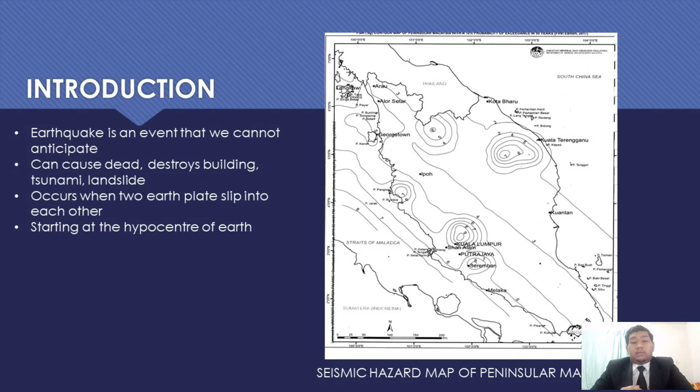This is the seismic hazard map of Peninsular Malaysia.

Problem statement. First, residential is a place or building that should protect us from any danger. But there were many buildings affected during the earthquake in Ranau, Sabah on June 2015. A residential building must sustain any disaster like earthquake because it needs to protect us from danger.

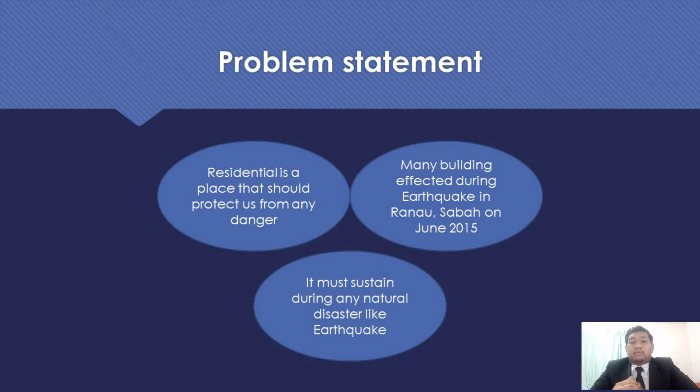There are two objectives of study for my project. First, to determine the influence of magnitude of peak ground acceleration (PGA) on the amount of steel reinforcement. Second, to determine the influence of concrete grade on the amount of steel reinforcement.

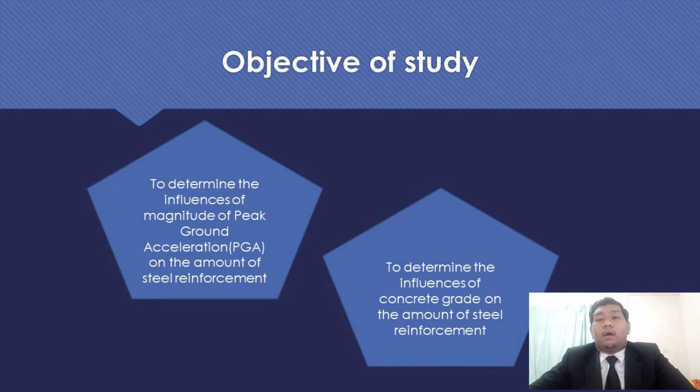Scope of study for my project: a 4-story RC building, assisted as a hostel, as the main model. 4 different magnitudes of PGA equal to 0.04G and 0.06G for ductility class low, and 0.07G and 0.09G for ductility class medium will be considered for design.

3 different grades of concrete will be used for this research: G25, G30, and G35. The model will be designed based on Eurocode 8 2004 and Malaysian National Annex 2017 for Peninsular Malaysia. Analysis and design will use Tekla Structural Designer software.

All models will be built on soil type D. The result has been discussed in terms of comparison of steel required as reinforcement, influenced by magnitude of PGA and concrete grade.

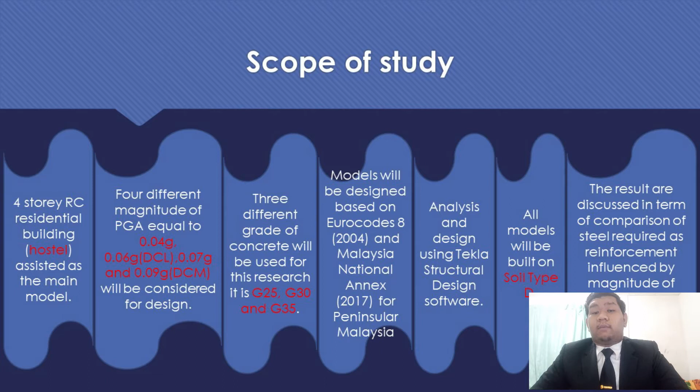My research has been supported by literature review that you can read in the slide.

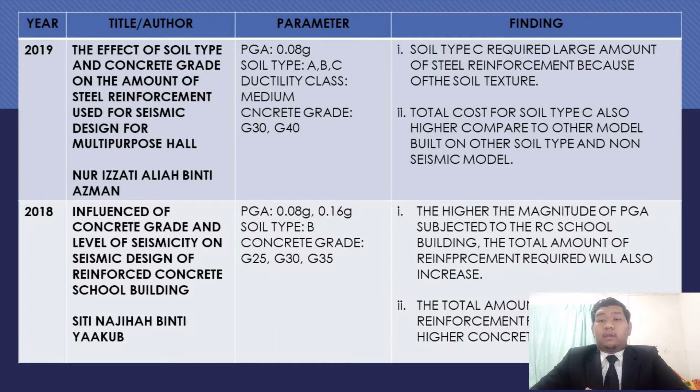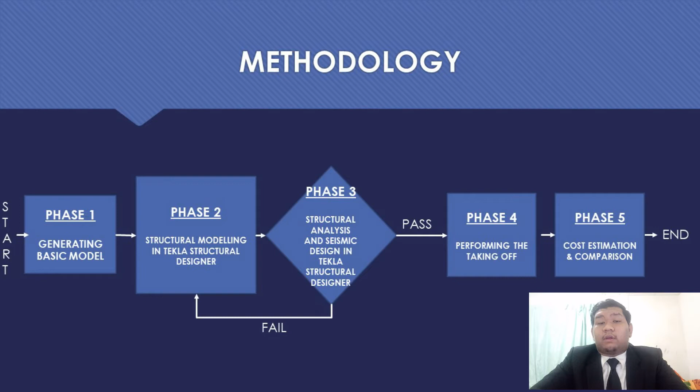This is a flowchart of methodology for my project. Phase 1, generating basic model. Phase 2, structural modeling in Tekla Structural Designer. Phase 3, structural analysis and seismic design in Tekla Structural Designer. Phase 4, performing the take-off. Phase 5, cost estimation and comparison.

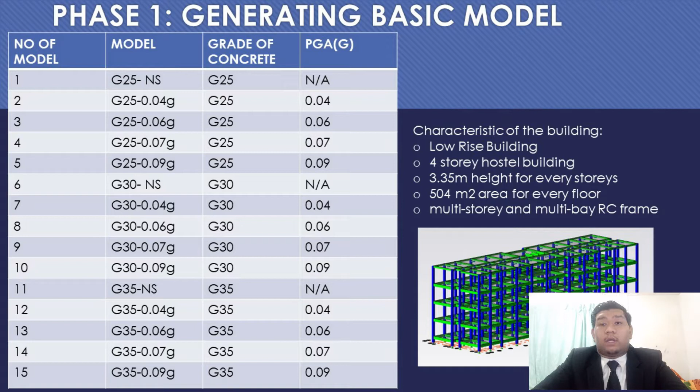Phase 1, generating basic model, which is a low-rise building: a 4-story hostel building with 3.35 meter height for every story and 504 meter square area for every floor. The building is a multi-story and multi-bay RC frame. This is the list of models that has been used for my research.

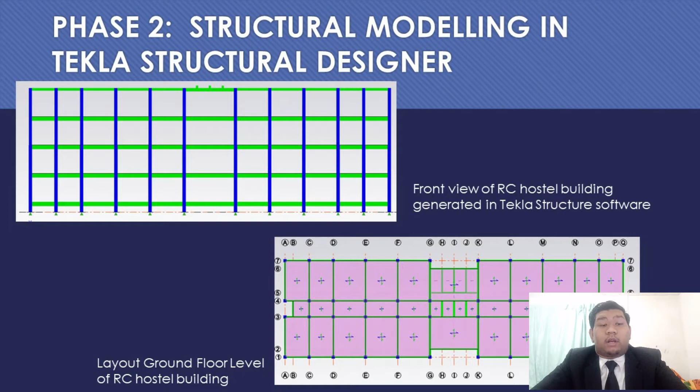Phase 2, structural modeling in Tekla Structural Designer. This is the front view of the RC hostel building and layout for ground floor level. For the building, we use two typical beams and two typical columns, which are BA, BB, CA, CB.

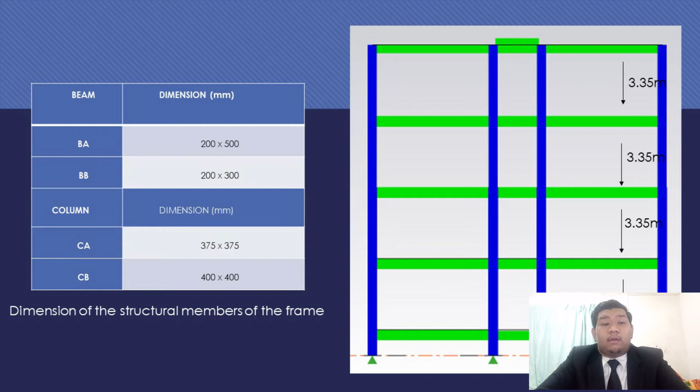Beam BA dimension is 200 mm by 500 mm. Beam BB, 200 mm by 300 mm. Column A, 375 mm by 375 mm. Column B, 400 mm by 400 mm. As you can see, this is my load case in the 4-story RC hostel building.

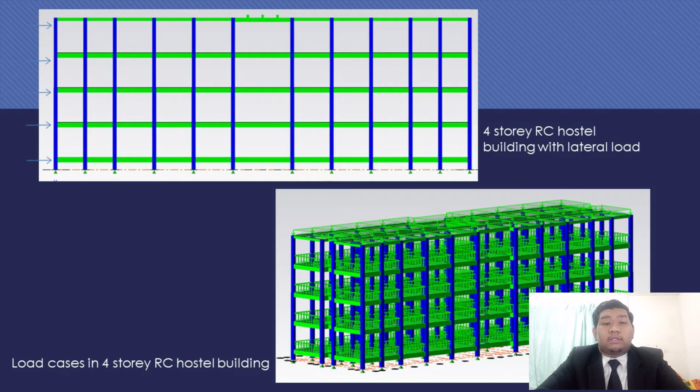Phase 3, structural analysis and seismic design using Tekla Structural Designer. This is the step to run the design. First, click the seismic wizard to set up the parameter according to the situation. Then click the design button to design and analyze the building.

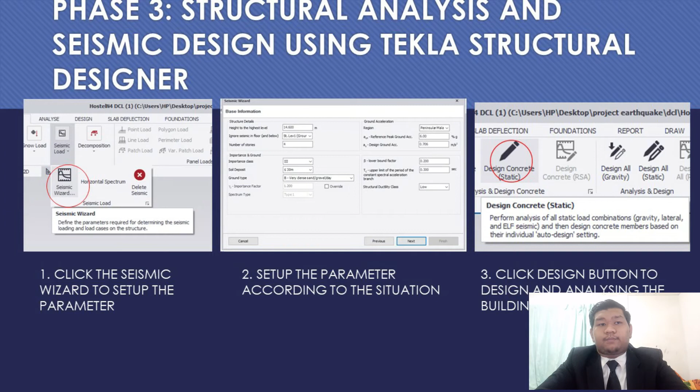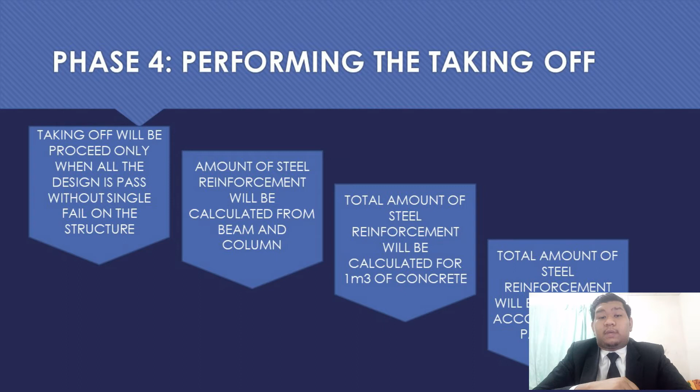Phase 4, performing the take-off. Take-off will proceed only when all the design passes without a single fail on the structure. Amount of steel reinforcement will be calculated from beam and column. Total amount of steel reinforcement will be calculated for 1 meter cube of concrete, and compared according to the parameter.

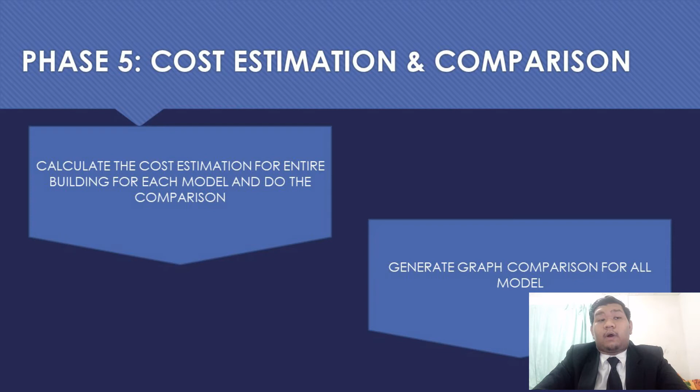Phase 5, cost estimation and comparison. Calculate the cost estimation for the entire building for each model and do the comparison. Then we proceed to the result and discussion.

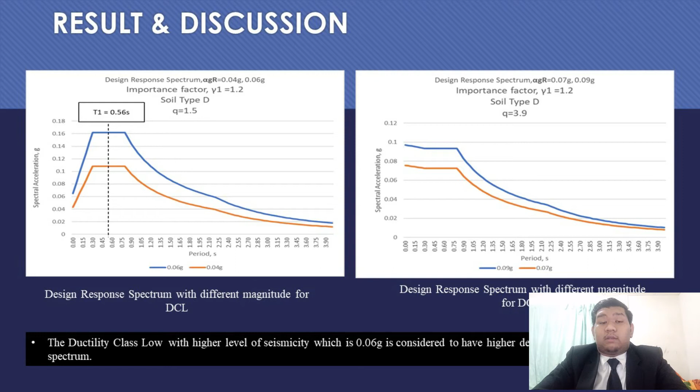This is two graphs of design response spectrum. The first one is for ductility class low, then the second one for ductility class medium. The ductility class low with high level of seismicity, 0.06g, is considered to have higher design response spectrum.

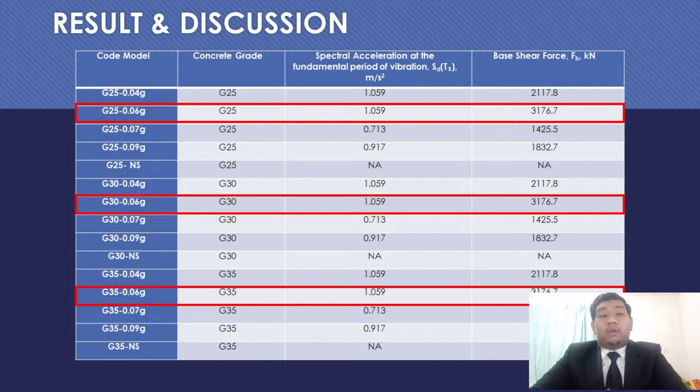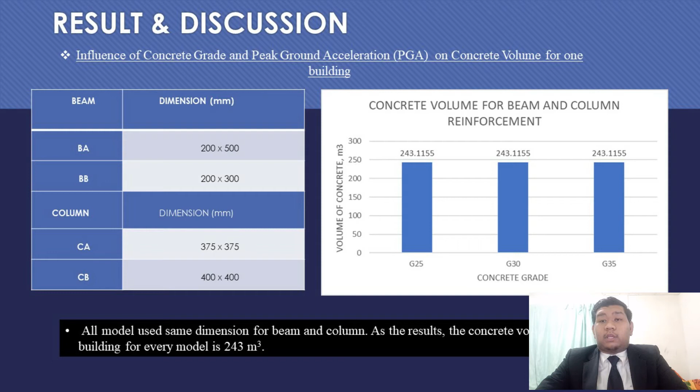This is the table for spectral acceleration of the fundamental period of vibration, Sd(T1), and base shear force. As I mentioned before, all models used the same dimension for beam and column. As a result, the concrete volume for one building for every model is equal to 243 meter cube. This is the result for the total weight of steel reinforcement per 1 meter cube concrete, normalized to the non-seismic model for concrete grade 25.

These are the percentage differences of weight of steel reinforcement per 1 meter cube concrete normalized to the non-seismic model, for concrete grade 25. PGA 0.04G is 60%, PGA 0.06G is 150%, PGA 0.07G is 20%, and PGA 0.09G is 50%. The highest percentage difference is DCL, ductility class low, with PGA 0.06G. The value is 150%.

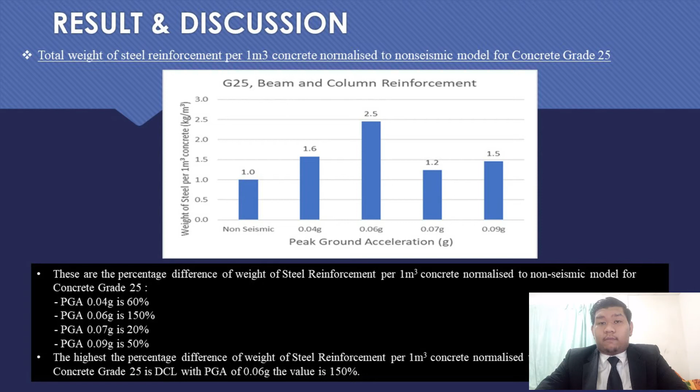This is for concrete grade 30. PGA 0.04G is 50%, PGA 0.06G is 110%, PGA 0.07G is 20%, and PGA 0.09G is 40%. The highest percentage is ductility class low with PGA of 0.06G. The value is 110%.

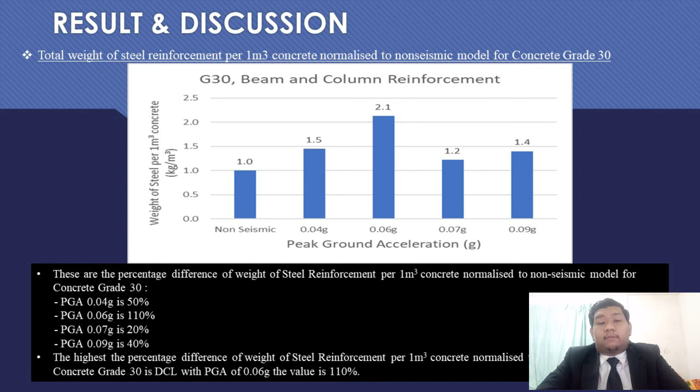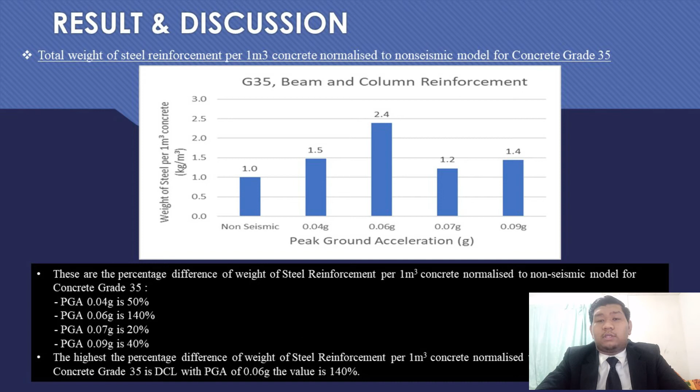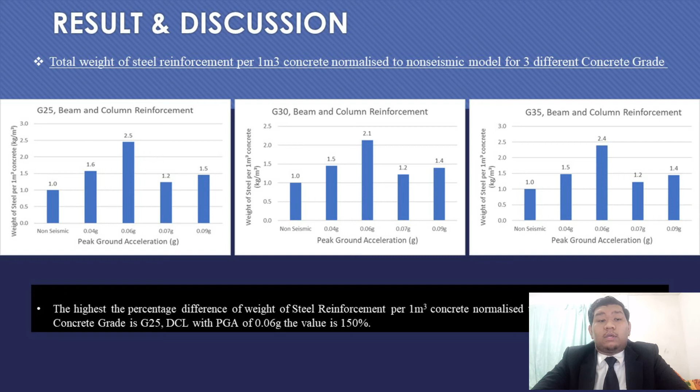Lastly, for concrete grade 35: PGA 0.04G is 50%, 0.06G is 140%, PGA 0.07G is 20%, PGA 0.09G is 40%. The higher percentage difference for concrete grade 35 is ductility class low with PGA 0.06G, the value is 140%. From the three results based on concrete grade 25, 30 and 35, the highest percentage difference overall is concrete grade 25 with PGA 0.06G, the value is 150%.

Next, we continue to total cost of material used. First, concrete grade 25 with price RM325 and 30 cent per meter cube. Concrete grade 30, RM372 and 10 cent per meter cube. Concrete grade 35, RM394 and 70 cent per meter cube. High tensile bar, RM3.50 per kg.

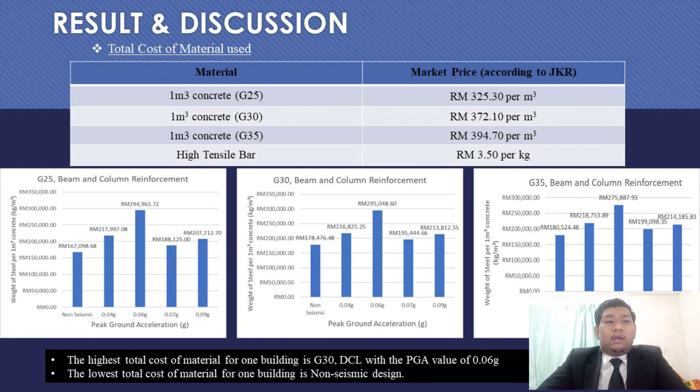The highest total cost of material for one building is for concrete grade 30 with ductility class low, PGA value of 0.06G. The lowest total cost of material for one building is the non-seismic design. This is the percentage difference of total cost of material normalized to the non-seismic model for concrete grade 25.

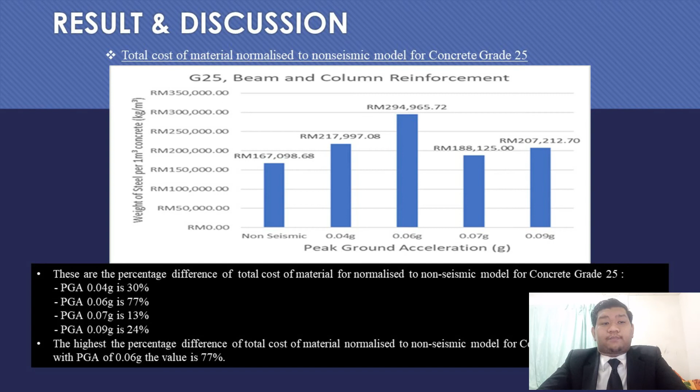This is for concrete grade 30. 0.04G is 21%, 0.06G is 65%, 0.07G is 10%, 0.09G is 20%. The highest percentage difference is PGA 0.06G, the value is 65%.

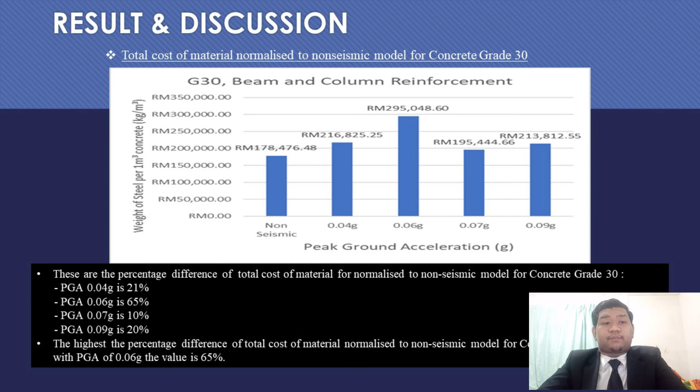Lastly, concrete grade 35: 0.04G is 21%, 0.06G is 53%, 0.07G is 10%, 0.09G is 19%. The highest percentage difference is for PGA 0.06G with the value 53%.

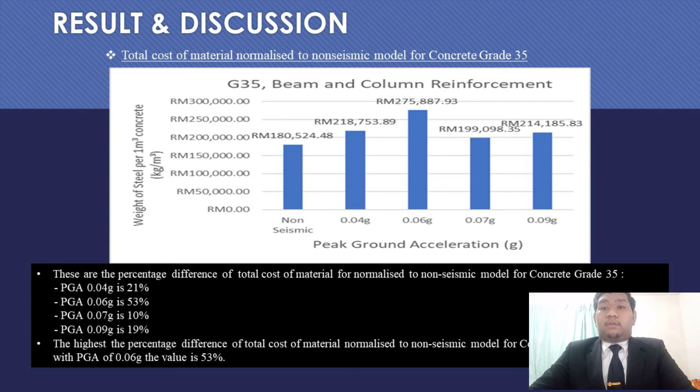And next we continue with the conclusion. First, for objective 1, to determine the influence of magnitude of peak ground acceleration, PGA, on the amount of steel reinforcement: the total amount of reinforcement required in a building is higher when designed to a higher magnitude of PGA and its ductility class. The total weight of steel reinforcement increased around 25% to 150% higher compared to non-seismic design.

The higher the magnitude of PGA in DCL, which is 0.06G, the higher the value of response spectrum, and the higher value of response spectrum at T1 resulted in higher value of base shear force. The bending moment will be increased, resulting in a higher amount of steel reinforcement required for the whole building.

Objective 2, to determine the influence of concrete grade on the amount of steel reinforcement: the total amount of steel reinforcement required for RC residential building with seismic design, when built with concrete grade 25, is higher compared to other models built with other concrete grades. For PGA 0.06G, the total weight of steel reinforcement increased around 150%, 110%, and 140% higher for concrete grade G25, G30, and G35 respectively, compared to non-seismic design.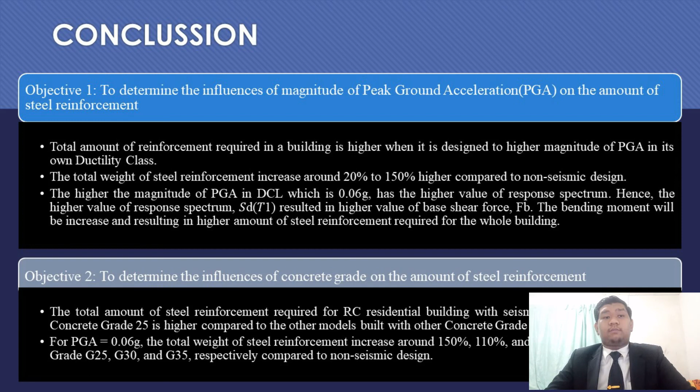For future recommendation, the variation of soil type should be considered in this study. Second recommendation: extend the study using high-rise building, as this study focused on low-rise building. Third: consider other elements like slab and foundation.